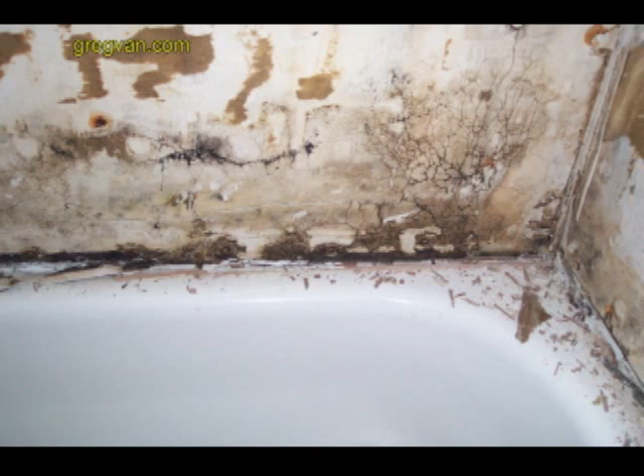Here's a question I received from someone, and I hope this helps you out along with others. This is actually something that happened to me. I had tiled a shower over green board, and this is actually what it looked like after probably about 2 or 3 years. It had a water leak. I want to say it leaked from the window. It got a little crack in the window.

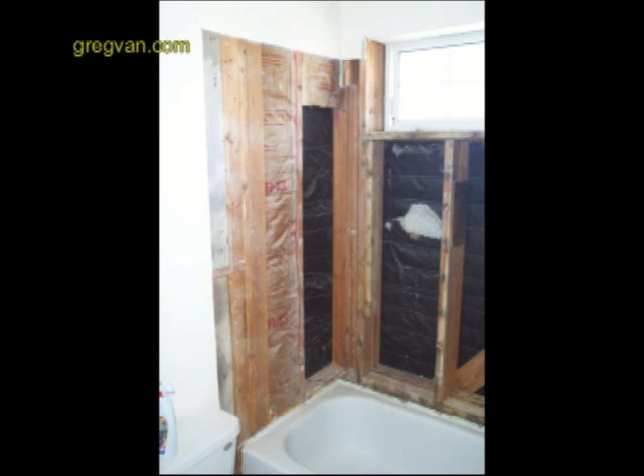And my kids were tall, so the water was splashing on top of the windowsill and eventually leaking in between the window frame and the tile. And it expands the green board, the drywall. And of course, it starts peeling apart, and you end up with something like this. Here's what the framing looked like, and it didn't look too bad. And again, this didn't go on for too long. I want to say it might have leaked for maybe 6 months, maybe a year.

You can see the mold growing, or the black spots there on the wood. And I simply sprayed this down with chlorine. Chlorine's a little stronger than bleach, and let it dry, and went back to put it all back together again, but didn't use the green board.

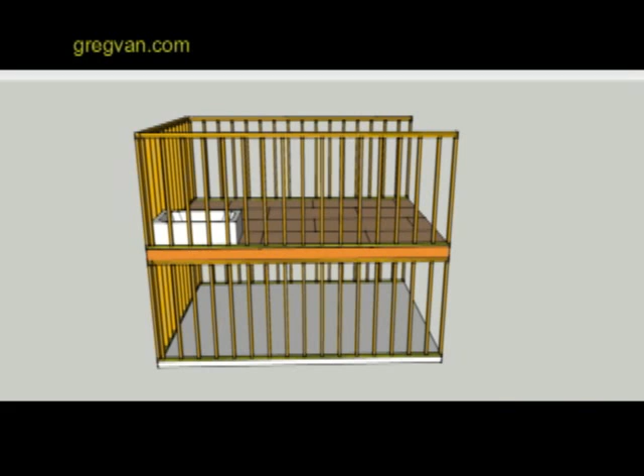Now here's basically part of the question from the viewer. They have a 2-story house with a bathtub and of course the green board. Same type of thing, but it looks like it had a little more damage done to it. And of course he had OSB shear panel on the exterior. Basically, here's what it would look like with the OSB sheathed or covered on the exterior of the house.

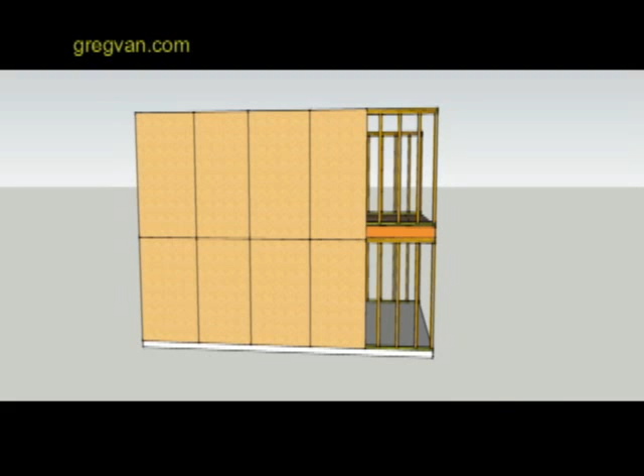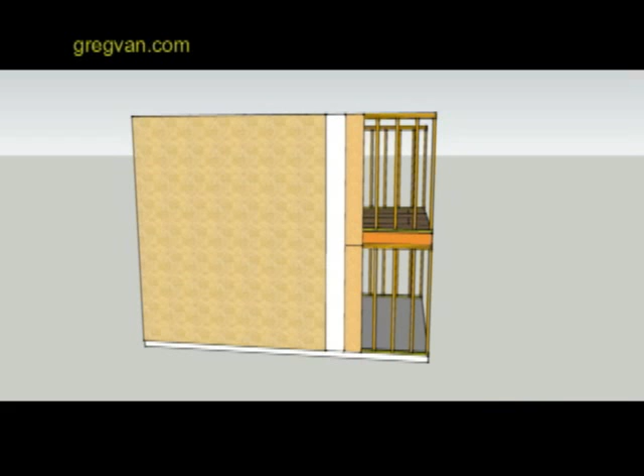And of course, the protective layer of building paper, usually it's Tyvek most of the time now, and over the Tyvek was stucco. So I just kind of drew these to give you an idea of what kind of problems you could encounter if you have a little too much damage from the shower. And here I just cut out a rectangle. Obviously your damage isn't going to be rectangular, but this was the easiest way for me to do it. I'm just giving you an idea of what it would look like if you had a

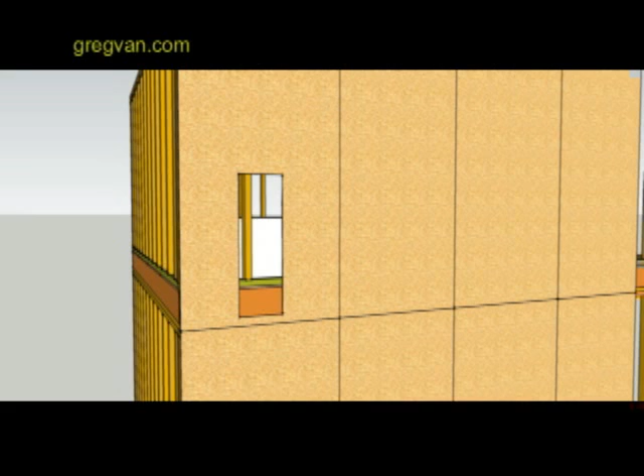small patch of damage. But the main point I'm trying to make in this video is that some of the damage is going to need to be repaired from the exterior of the house, which would actually require removing the stucco. And I understand that would be a big job. It's not going to be something easy. And of course, you're not going to be able to fix it from the inside, because you're not going to be able to reach down. How far can you reach down without removing the bathtub? And don't forget that the subfloor, the plywood or OSB that the bathtub is sitting on, could also be damaged.

So it's not like you can take the tile off, take the backer board off, repair the damage there, and you're done, because you really don't know the extent of the damage without doing a little more forensics, which would be removing stuff like the stucco and the bathtub. And like I said, I understand that could be a big job.

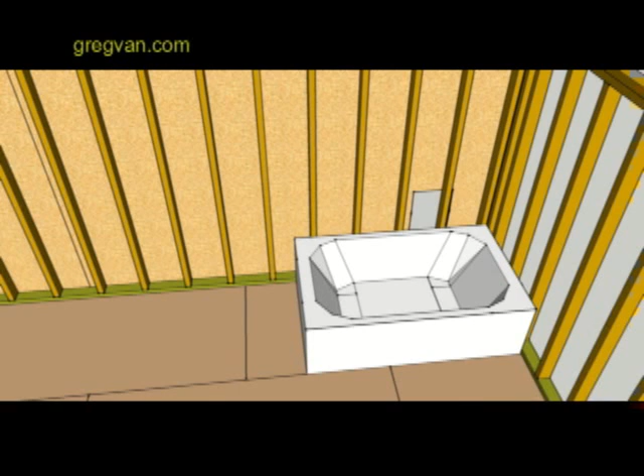I drew a little longer rectangle just to give you an idea. The damage from a bathtub or a shower in a 2-story building can go all the way down to the bottom, wherever you have wood underneath the water damage. It can travel great lengths and do all sorts of damage. Of course, the sooner you catch this stuff, the better you're going to be.

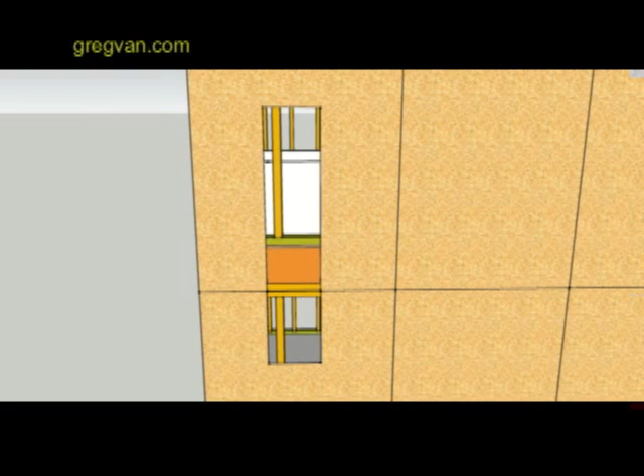But to answer one of the questions in the email: do I just leave the OSB alone, let it dry and go forth with the project? That's going to be up to you, because you can fix the damage that you see, or some of the damage, but you're probably not going to be able to fix the damage that's underneath. So when you spray these areas for mold with chemicals, how much are you actually going to be able to kill?

You would need these chemicals to actually cover the areas where the mold actually is. And if the mold is in the ceiling or the wall framing for the first floor, then you're not really going to be killing all of the mold. So you're kind of going to be putting a band-aid on this thing by just replacing some of the damage.

But it all goes back to how much of the damage are you willing to replace? How much work are you willing to put into this, and how much money are you willing to spend? I mean, a lot of people just take a situation like this. They just go in and they fix what they can because it's going to cost them thousands of dollars to fix the rest of it.

But if you want to do it right, you will need to probably remove the bathtub. You will need to remove some of the stucco and get all of the water damage repaired, all of the mold killed, stuff like that. And like I said, a lot of people aren't willing to put that in, and I don't blame them because it costs a lot of money.

Another question: hold on a second. Do I just leave the OSB alone and let it go forth? Okay, I already read that. If I leave it be, will the mold keep growing? Obviously, if there is moisture, yes, the mold will continue to grow if it's in a damp area.